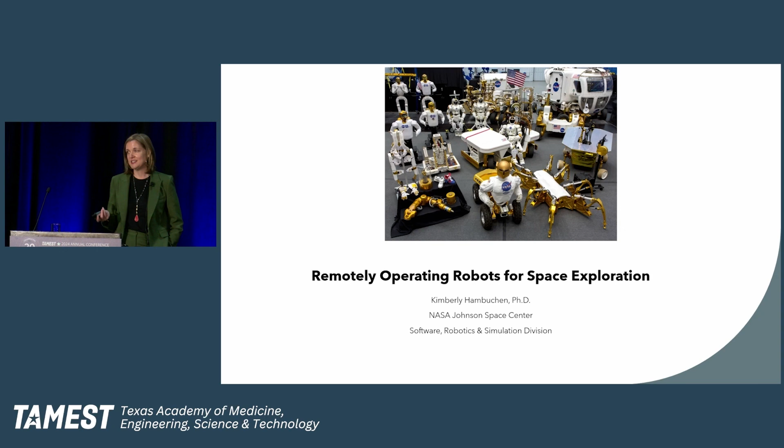There we go. OK. So what I'm going to talk about this morning, and I'm going to try to stay on time. It's difficult when you have lots of robots that I would really like to discuss. But I'm going to talk about remotely operating robots for space exploration. That's really where I've focused my career since I came to NASA. And it's interesting, I worked on developing cognitive structures and systems for robotics in grad school. And then when I came to NASA, realized, well, we kind of need to make things work. So I moved into an application space instead of doing real research.

And really, what my focus in my career has been on is how are we going to operate complex robots in space when they are not surrounded by people to tell them what to do. And we've got these three really difficult constraints that we're working with in space that terrestrial applications, for the most part, don't have. Number one, we have time delays that are very large. People who work in terrestrial robotics think large time delays are 100 milliseconds. But we're talking about, with Mars, it's between 7 minutes and 42 minutes round trip from when you send data to something on Mars and you get the data back.

And then we also have really limited bandwidth. We're not going to have gigabit Ethernet to talk to the gateway system that Vanessa discussed yesterday. We'll have limited bandwidth, which means you've got to be really careful about what data you're sending from a robot to a ground operator, what data you're sending back to the robot. And then our third constraint, and hopefully this is going to be changing in the near future, is that we have limited processing power to work with on these robots.

For instance, Vanessa spoke briefly about the VIPER rover that we are currently integrating at Johnson Space Center. And I believe it's using a RAD750 processor, which, my Apple Watch is better than that. So a lot of the really intense processing that you need to do for some machine learning type applications cannot be done on those types of processors. We do have folks working on better radiation hardened processing, but 10 years ago, I heard it was right around the corner, and I'm still hearing it's right around the corner. So we'll see how that really goes. So we've got those three constraints that we're dealing with.

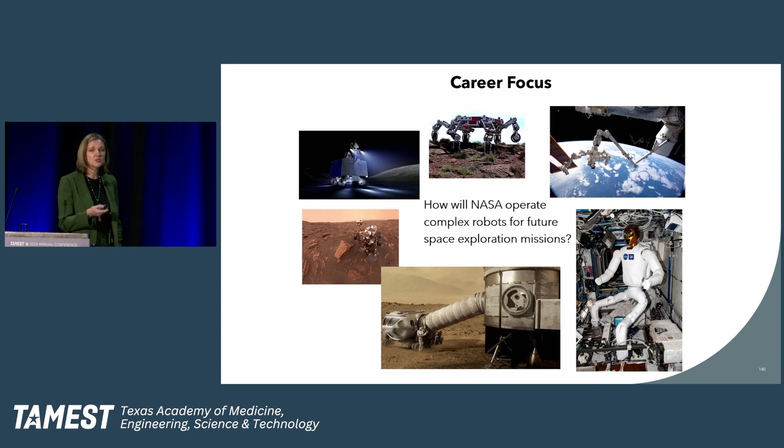And the other thing is that we're envisioning a whole bunch of different robots working together in a distributed environment. So back to this picture. This is our family picture that you may have seen last night. And these are all different prototypes that we've built within my robotics group at JSC. And so you can see you've got humanoids, you've got a spider robot, you've got big rovers, you've got small rovers. So we really would like to have this complex group of robotics working together on planetary surfaces, and right now really focused on the moon. But how do you operate all of these robots?

So for those who don't know in the room, robots aren't going to take over the world anytime soon. They are still pretty stupid. You can watch Boston Dynamics videos all day long, but then you also need to go watch the videos they put up of when it fails miserably at what it was supposed to do. And we're still trying to figure out how to actually integrate machine learning and artificial intelligence into robotics, because it's different when you move from data in a computer to an actual embodied thing that is moving around and interacting with the world.

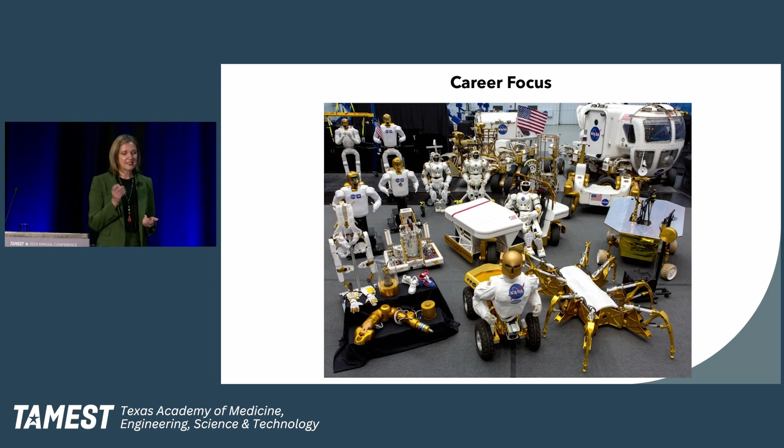So when I started at NASA, I was asked to work on this project that was looking at how to operate a humanoid robot over time delay. Nothing's moving. There we go.

And Mike Goza is wearing like a $35,000 VR helmet. He's got several other sensors on him, and all the motions he does, the robot copies. And so basically, the robot is his avatar.

We really wanted to figure out how to operate this type of robot with a small time delay. Is this something we could operate on the moon with a person on the ground in this manner? Because we still were not, and we still aren't, able to have fully autonomous humanoids that are doing exactly what they need to do. So with this project, Mike was operating a virtual Robonaut avatar, and

we were predicting Mike's movements with this virtual avatar. So we were predicting the intent of Mike's movements. And this was really interesting, but you can see we have a very simple setup.

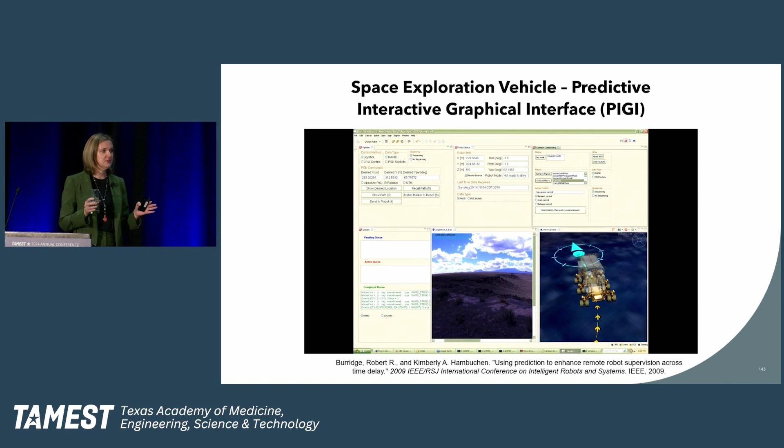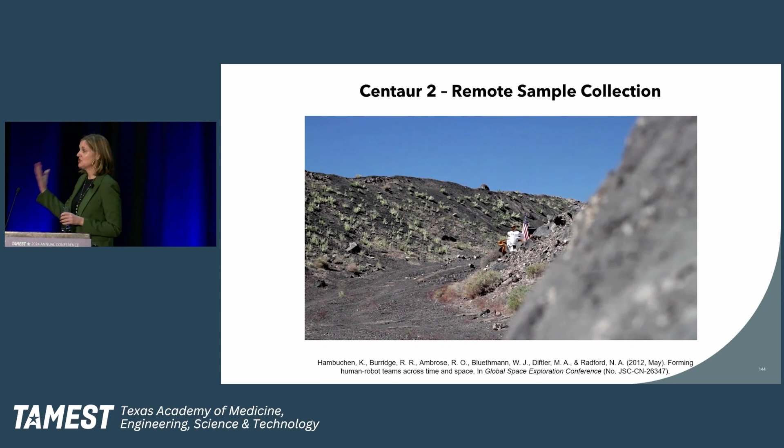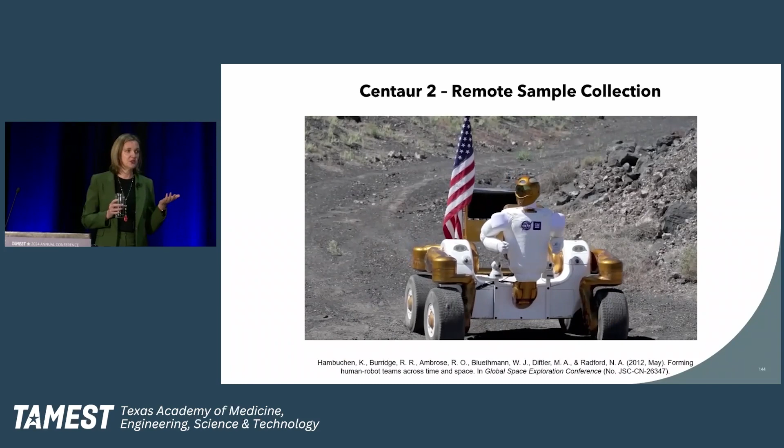And then I was asked to make a Robonaut 2 on a mobile base, which we call Centaur 2, go collect science samples out in the desert in Arizona where we were simulating operations on the lunar surface. So this one was really interesting.

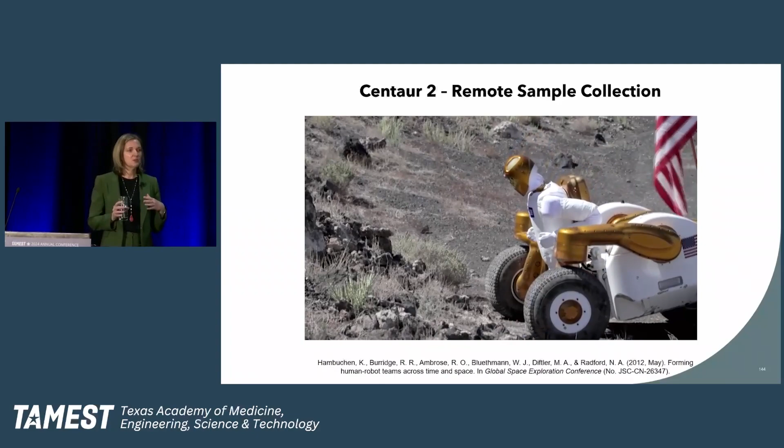I had the PIGI that I could work with for telling it where to go on the wheels, but the intent prediction wasn't going to be very useful for picking up unknown objects in an unknown environment. That's a lot more useful when you're in, say, an International Space Station that you have a full model of and you know where everything is.

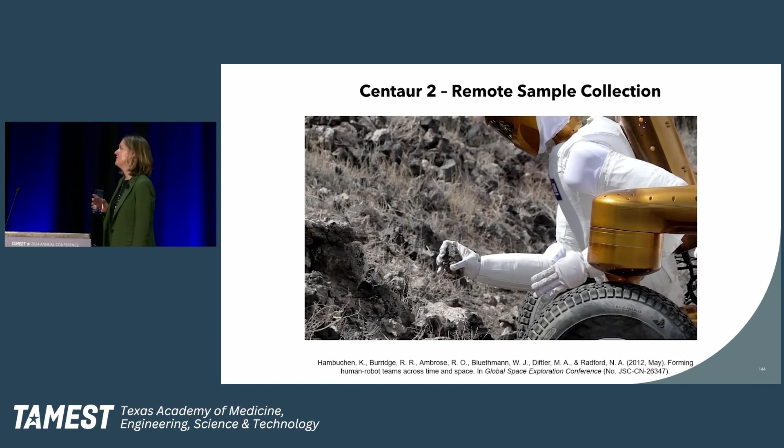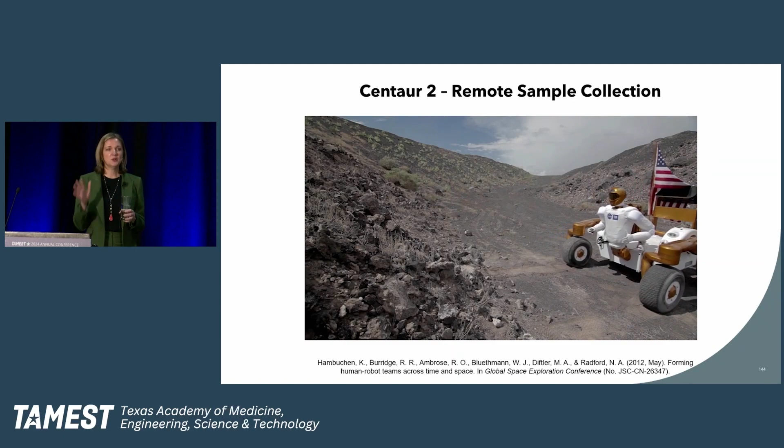So we developed this not very effective method using kind of some triangulation between depth images. And it really showed that we had a problem in how we were operating these robots, because nothing that we had been doing was efficient. It would take a whole lot of time to use the methods that we were using.

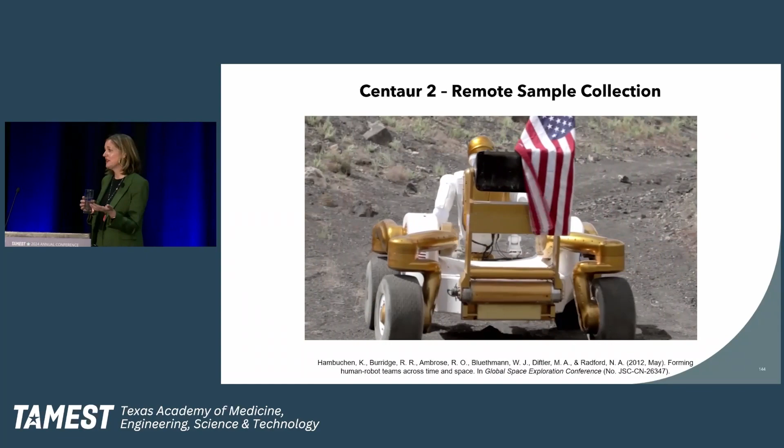And then came along, to follow after Centaur 2, the DARPA Robotics Challenge. So we participated in the DARPA Robotics Challenge, which was a challenge that, I believe, was designed to kind of advance humanoid robotics. What it did was really advance how we operate complex robots.

So I'll let you read all of that, but this was a 15-month effort from design start until we went to do our competition with a whole bunch of other people. And we decided to build a bipedal humanoid. And we had to do 5 tasks. And each of those tasks has an object that it needs to work with to execute the task.

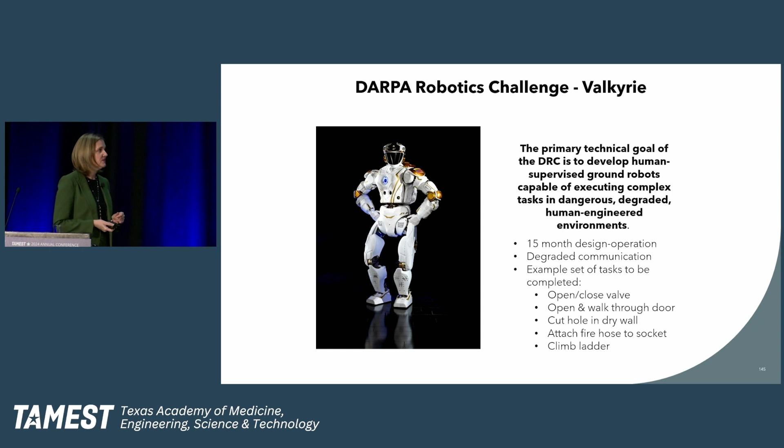And so the other thing we did with this was we decided we were going to use something called ROS, the Robot Operating System. That is an open source framework and set of tools that if you build your robot to basically use ROS, then anything that people put online, open source, you can use. Changed the game for me, because I was back in grad school writing Canny edge detectors, just to get some computer vision work done. So because we decided to use ROS, we now had a whole suite of tools that were open to us. And while going through this 15-month design and operation, affordance templates were born.

So affordance templates is just a really fancy Ph.D. type word for a task execution template. It's really about telling the robot, here is where you need to put your end effector or your foot or something in order to interact with the object to complete the task.

And I just got reminded of me talking in that video last night.

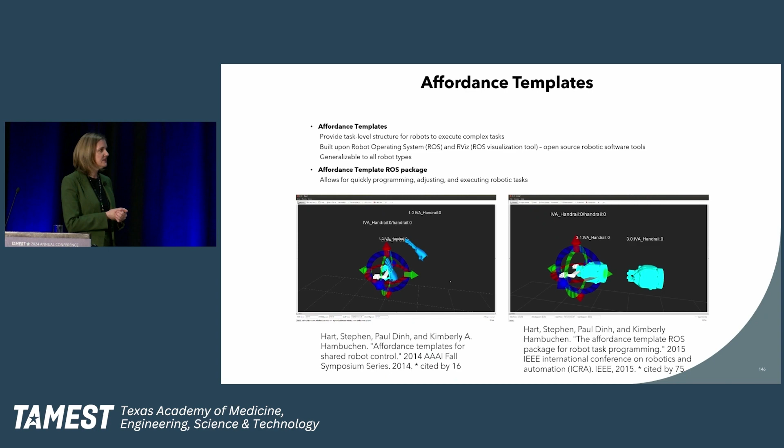So the affordance template ROS package was developed. This changed the way we were operating the robot, allowed us to actually more quickly get things done, and really give the robot some good information on how to complete these tasks.

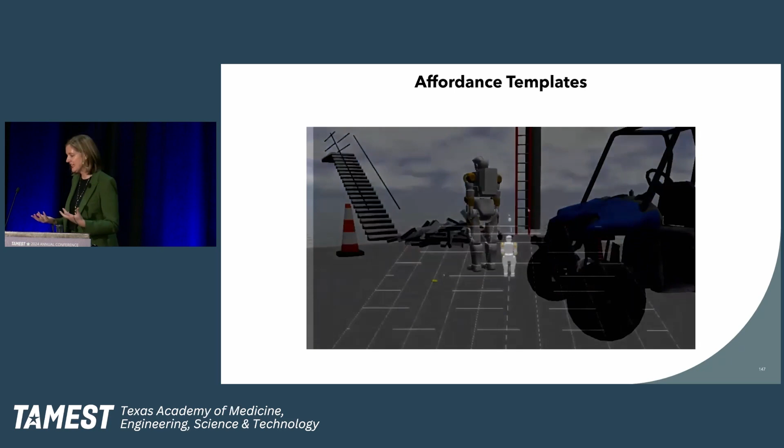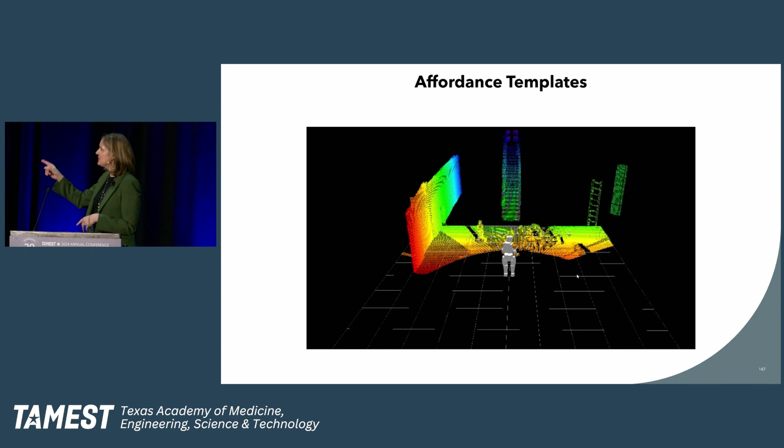So this is the best video I could find to show you what it really looks like. So this is a simulation of a robot, and it's got sensors, and it's collecting sensor data, so it's creating a depth map of its area. And if you're a human operator, you can see there's a ladder. You can see there's stairs. So affordance templates allow you to create a template that shows the robot how to walk up the stairs.

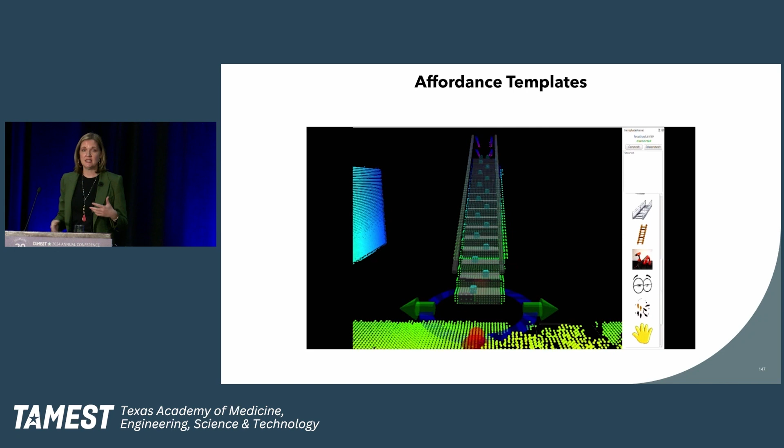So we don't have to have a very fancy machine learning algorithm to teach the robot how to walk up the stairs. We just say, here's where you place your feet to walk up the stairs. You can do the same thing with the ladder. We never even attempted to climb a ladder, but here's where you place your feet and your hands to climb up a ladder.

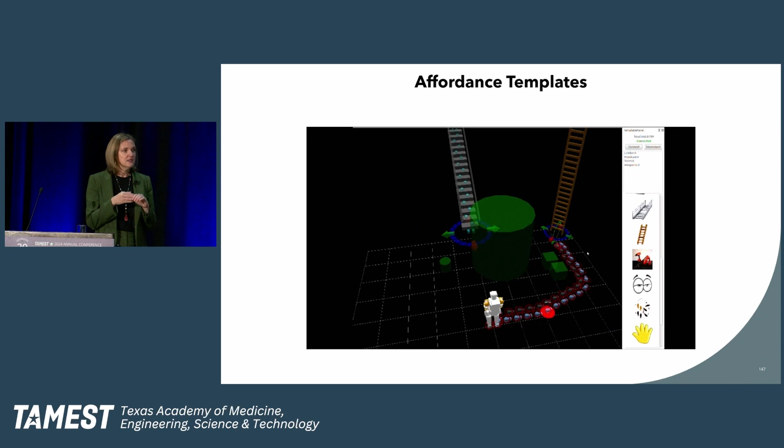So we did a similar thing with, there was a task to close a valve. We didn't know what the valve was going to look like, but we created different templates of valves and showed the robot, here's how you have to move your hands, your end effectors, to close the valve. Here's what you have to do to open the valve. So it really changed the game for us at NASA.

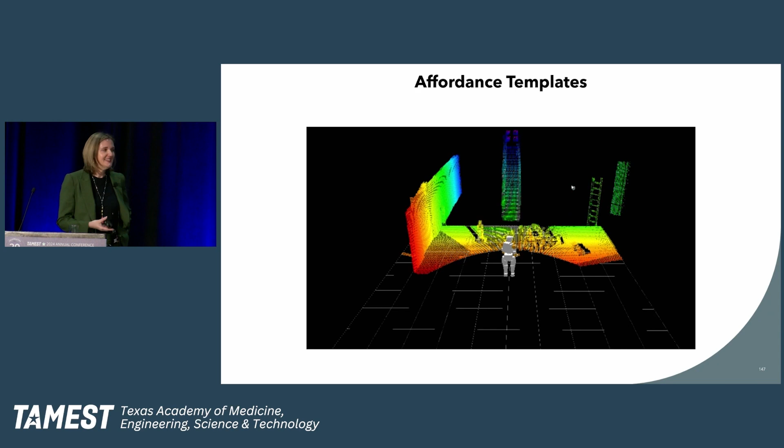And I'm sad to say that we did quite poorly at the DARPA Robotics Challenge, but this and then the Valkyrie robot were two of the best things to come out of placing very poorly in that challenge. So after we did poorly and I got over it, I was asked for some help with Robonaut 2 operations. Is that moving?

There we go, okay. While we were doing the DARPA Robotics Challenge, there was another group that was actually designing climbing legs for Robonaut 2, which had been sent to the International Space Station. And they had sent the legs up to the International Space Station. An astronaut was going to do some robot surgery on the station. And the group that was doing this really didn't have a good way to do operations for Robonaut. And so I said, why don't I just go ahead and port affordance templates to your robot? Because it was designed to be generic so that it could be infused into any robotic system that's using ROS.

And oh, I have several videos on this. Just click through them all. So once we did that, all of a sudden, changed the game for the Robonaut team. They were able to, there we go. I have 4 videos. There we go.

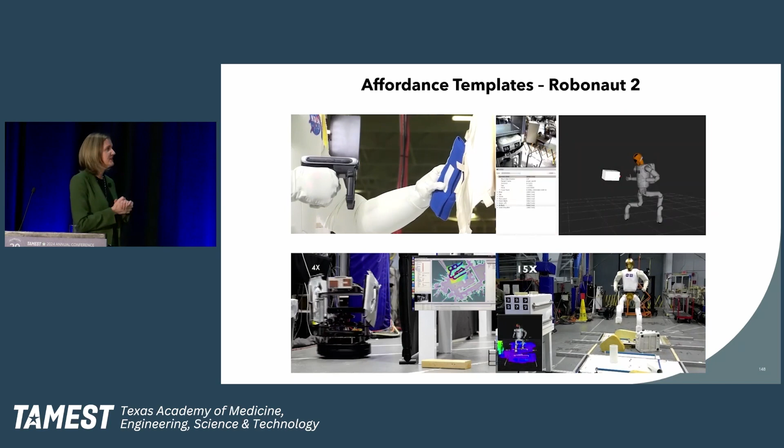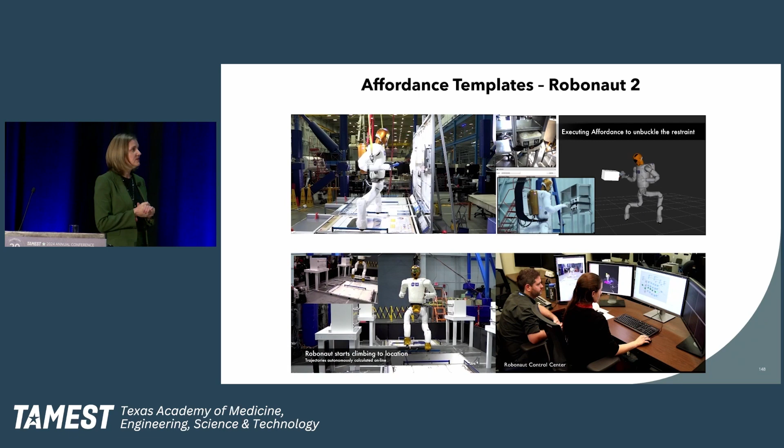So they were able to much more easily operate this robot. They had several demonstrations they needed to get through. And by the way, this is in our active response gravity offload system in our large building at JSC. So we were able to do demonstrations of how it would be on space station. We were able to offload the robot to 0 microgravity. But this is when I kind of saw the real effect of what this technology was going to have.

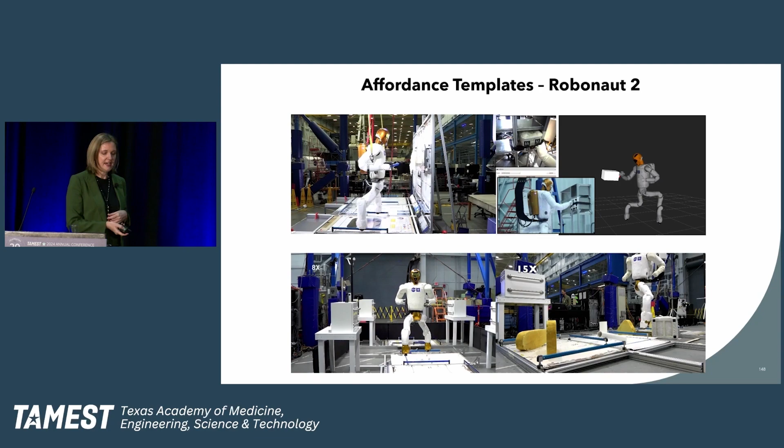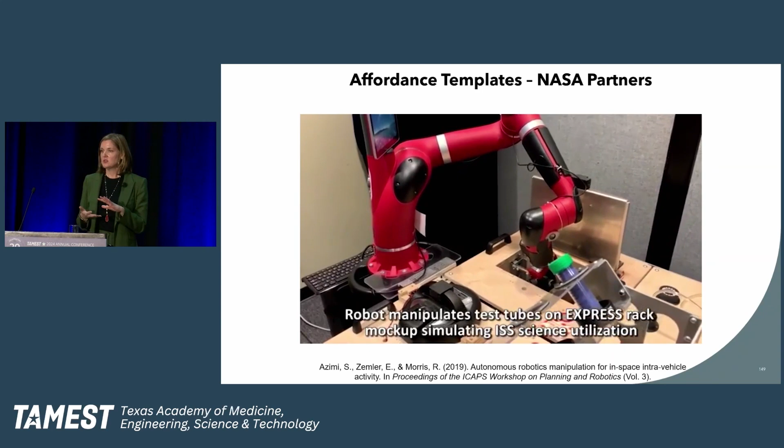And so after I was able to do that, other people started taking my work and using it. This is actually a video of some robotic systems doing high-level task planning, and they just assumed that they would use affordance templates to do the task execution. So it started becoming ingrained into the work that people do.

And then, there we go. We actually started working with a company called Woodside Energy in Perth, Australia. We have a Space Act agreement with them. They did have a Robonaut, now they have a Valkyrie on site in Australia, and they wanted to start using affordance templates because they realized this was easy to program, easy to use, and they're very interested in having unmanned rigs, taking people out of the very dangerous parts of their environment.

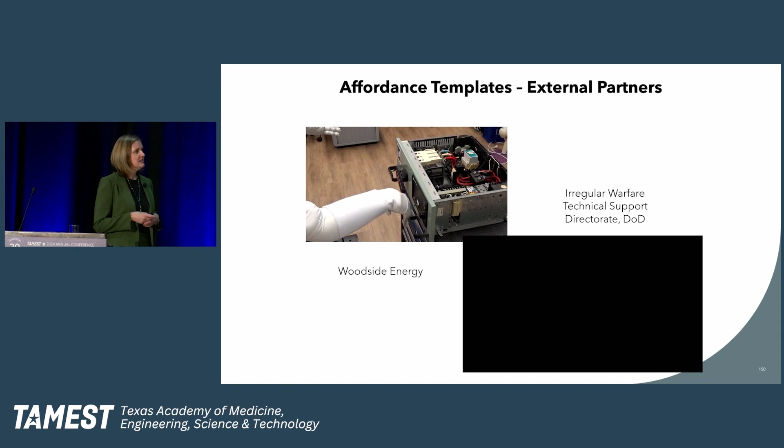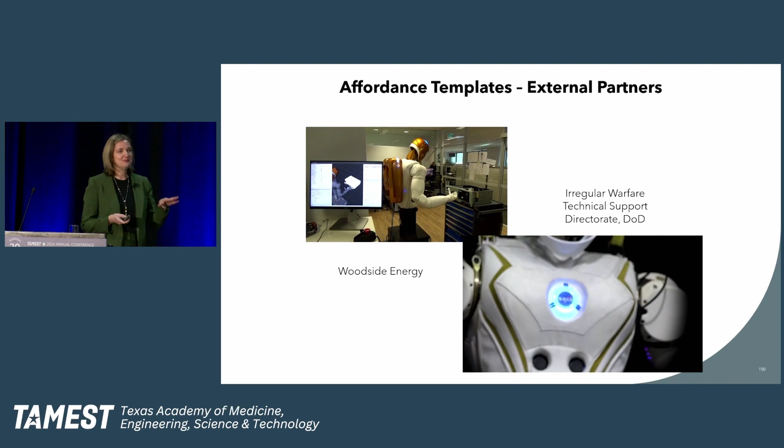And then we started working with the Irregular Warfare Technical Support Directorate in DoD, used to be CTTSO. They were really interested in how a humanoid-type robot could help in looking for potential bombs, defusing bombs. And we had some operators of bomb disposal robots, and they saw affordance templates, and they were like, well, how do we get that on our robots? So that was really exciting for me to see people get excited about technology that I had created.

I will say, I have so many robot videos, but not enough time. I tried my hardest to get affordance templates on the International Space Station robotic manipulator. And after doing a rotation at International Space Station, I realized why I was never going to make that happen. It's very difficult. They are stuck in their ways. But we did some testing.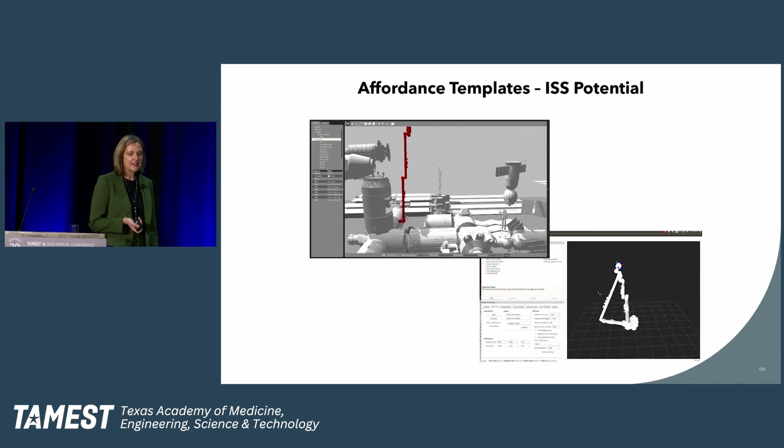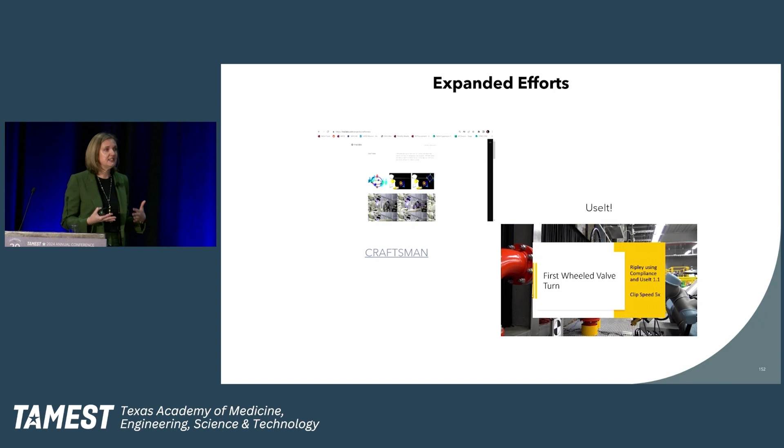And then lastly, we found that people have actually taken the affordance template work and expanded on it. So Craftsman is a product from TRACLabs in Houston that is based on affordance templates, and they are actually selling it to industrial operators and have licensed it. And then Woodside has collaborated with us to actually start putting some machine learning into the affordance templates themselves to start moving towards more autonomy.

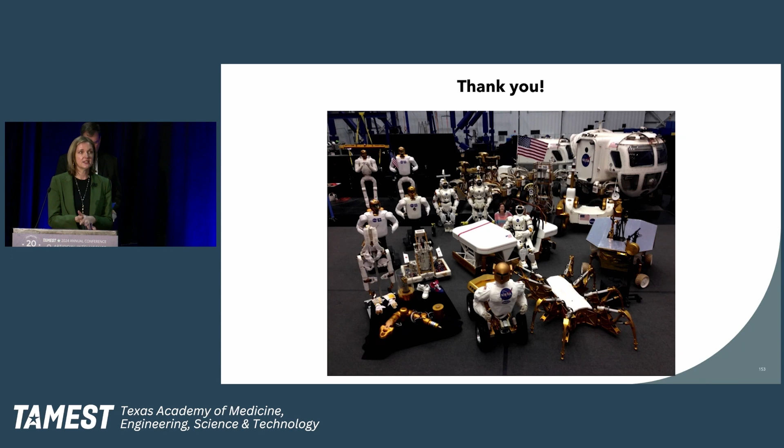And you know, I am focused on human exploration missions at JSC because that's really our charter down there. I don't know when we're actually going to have robots and humans working together in space. I mean, we kind of do with Space Station Arm. The astronauts have to operate that themselves sometimes in certain scenarios. But I'd really love to see some sort of small little manipulator or dual manipulator assisting astronauts on board a space station doing utilization tasks, because crew time is very, very expensive and very hard to come by. They spend a lot of time fixing things up there.